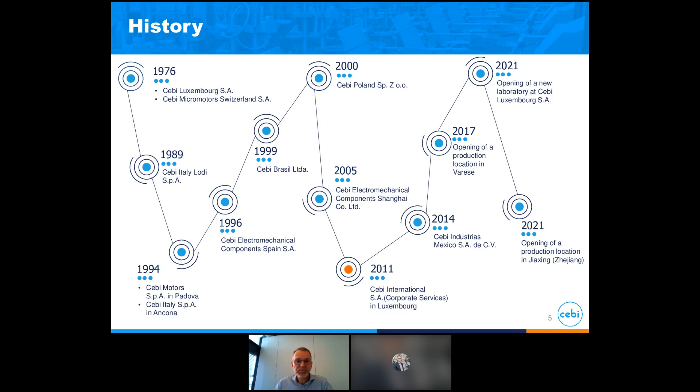From a map footprint perspective, we are heavily centralized in Europe, in terms of our people but also our business. About 85% of our turnover is Europe. We do have a plant in Mexico, one in Brazil, and one in China. Mexico and China are growing very fast, which is obvious due to these large markets developing there, but they are still small compared to the rest of Europe. So we are basically a European company, but we can serve global customers very well.

Because we get a lot of requests from customers to express our commitment to being carbon neutral at a certain moment in time, we fill many forms. We do a lot of calculation down to the fuel consumed by the ship that ships our parts and so on. It's really a jungle in a way to figure out what to do to respond to this need, and we're also too small to push this down our own supply chain. So we're interested to understand where everyone is, and if somebody has a good idea on how to approach decarbonization, I would be interested in some feedback on that.

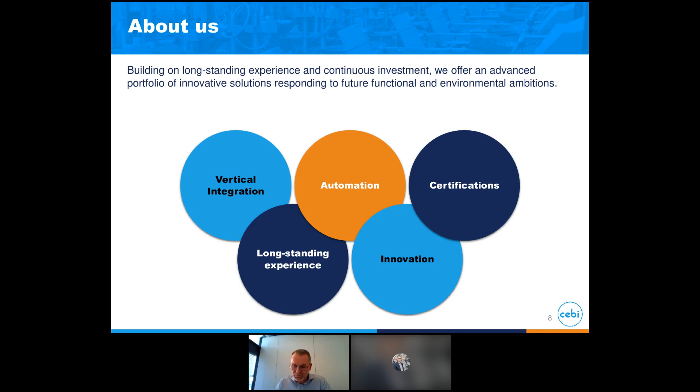Okay, then I want to dive a little more into the product, but not spend too much time. We divide our business into 4 different sectors. It's the automotive sector, it's the household or white goods sector. Then there is a small residential and industrial sector with mainly ventilation and air conditioning products. And then on the right side, the electric vehicle sector that is seen a little bit to the side for the specific components in power electronics. But as you can see on the bar chart or the pie chart on the top, most of it is automotive.

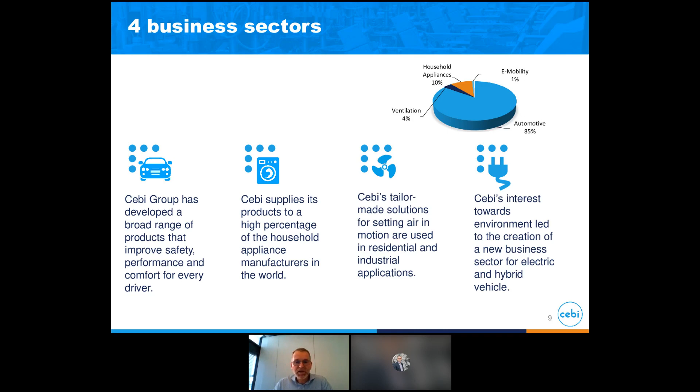We actually attempted to diversify, and that is maybe worth another discussion at the end. Especially during the crisis when no cars were sold back in 2020, we considered, okay, where can we sell our products outside of automotive? And we identified around 20 sectors where similar products are sold. But then we also found out, okay, it's a different world. In some cases the quality is way lower; in other cases it's way higher, like in aviation, for example. But also the way of doing business is different, the network is different, contracts are different, so you can't just diversify overnight, except if it's something coincidentally very close to something you do already. So we did not do that step in the end. We remain an automotive company with a 15% non-automotive share, but I'm interested to hear if somebody else has made a step like this and what their experience is.

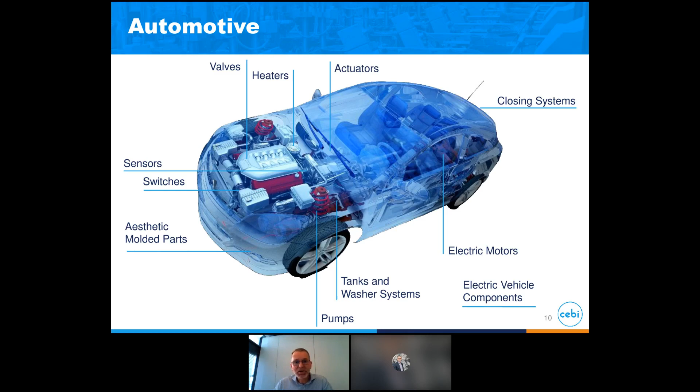So now the automotive products, you see it's a little bit all around the car: sensors, switches, plastic containers, plastic parts, interior and exterior, electric motors, closing systems, actuators, heaters. There are a few pages here that show the products in a little more detail.

Like I mentioned, the smallest temperature sensor is way below €1. The largest product we sell is maybe in the range of €30, with an integrated washer system, multiple pumps, pipes and nozzles and so on. So it's in that range where we navigate. I repeat myself, but I insist here that, for example, in case of a washer reservoir like this, we buy the raw plastic, we buy the sheet metal, and we do everything in-house. So the value chain is all under one roof, and we control the entire flow of material from the raw material to the final product, which is one of our secrets, if you will.

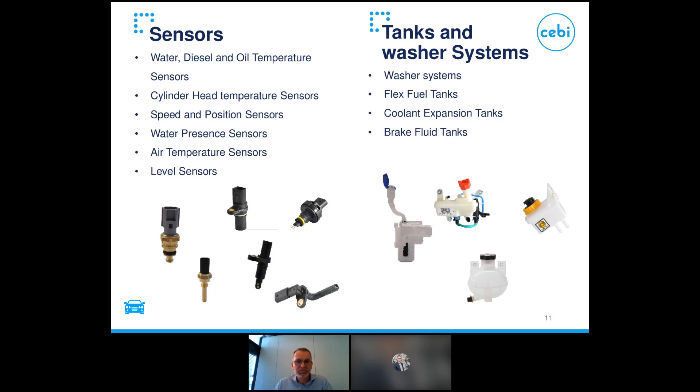Further products, some switches around the engine. These are oil pressure switches. Mentioned already the water pumps.

These are washer pumps for the windscreen washing, but now you also have these pumps that are turning the cooling liquid around in electric cars. Of course, you don't have a mechanical pump anymore, so they need to be electrical pumps. And by the way, there is more than one because you have more than one circuit. So this is a new product coming up that is already sold at millions and going up very steeply. Good opportunity for us. Likewise for some valves, pressure control valves, flow valves, check valves, and so on.

Then there is some heaters, less used in electric cars, except for maybe passenger compartment heaters, but these were more engine-related fuel heaters or anti-ice devices, and this is a business that is going down and then replaced by some other products.

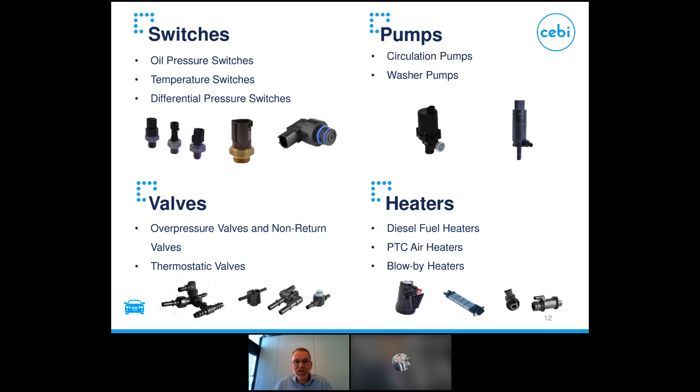Further down, actuators, so everything that moves a flap in the air conditioning system or that moves your headlamps up and down as a function of the vehicle load, those kind of actuators we're very strong at.

And then we're also showing some electric vehicle components. Just a little anecdote, we were actually one of the first companies making electric cars about 15 years ago. This was a Renault Twingo converted to electric. About 1,000 cars were built and sold in the southern Switzerland area. And then we stopped again because all of this was based on a sodium battery technology that didn't make it against the lithium polymer batteries.

So that battery technology was sold, and with that, basically the electric car production was stopped. But there's some product left, like the electronic DC-DC or AC-DC converters, actually a traction motor and so on. But we don't have the battery anymore, and then all these technologies are, I would say, obsolete right now because it's evolving so fast. So this is more of a historic product for us, ironically, in the current times. And we do not have intentions to re-enter the electric powertrain market again, because there are so many players already, and it's too big an investment for us to try and get back in there. So we remain on the level of the individual component or the small systems.

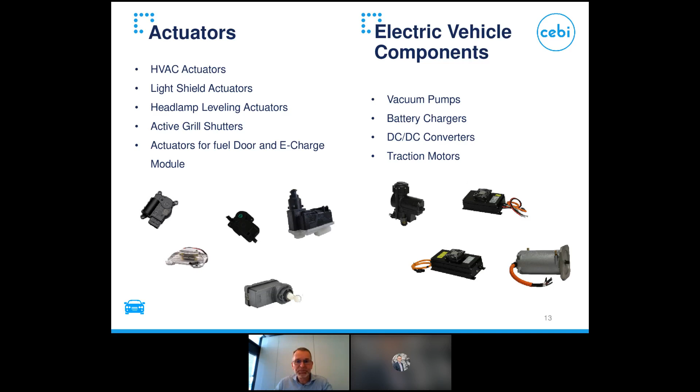More products, small electric motors, about 25 million per year for window lifters, seat motion, and also automatic door openers for certain cars. Then you have latches, not for doors, but for hood or trunk. So the hood latch, of course, is a mechanical latch, and then the trunk latch is an electrical latch in most cases.

Now with electric cars, it's very interesting because the hood becomes the trunk in some cases. So you need to have an electric opening and closing system also for the hood with different safety requirements than for the trunk. So this is, for example, a new product driven by electromobility that has nothing to do with the electric drive, but that is still a new product because the electric car is constructed a little different than the current vehicles.

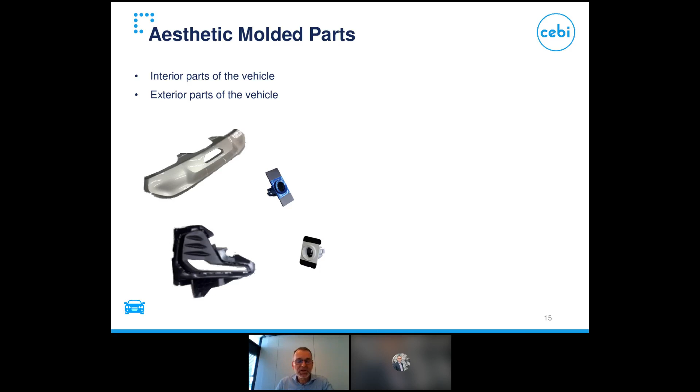And the new product that we introduced just 2 years ago is large plastic parts. You see a complete bumper here, and then you also have some exterior and also interior decorative parts. These are currently only made in Brazil, but it's an interesting business that we discovered because we do have very strong knowledge in injection molding, and so far we only used this injection molding to make our own parts until a customer told us, why don't you offer a bumper or an interior trim? And we found out that with the knowledge we have, it's something we can do. And since then, this has been a growing business for us.

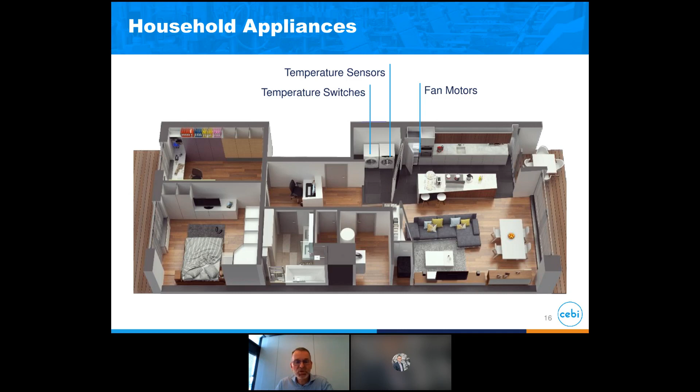Then I want to cover briefly also the other side of the business. So household: dishwashers, dryers, washing machines, suction hoods, fridges, and ovens.

If you look at your oven at home, you probably have this fan in the back, and it's likely that this is one of our motors. We supply all of the electrodomestic suppliers in the world, so we're really very present. It's not big business, but it's a stable business.

Then you have fridges with these little fans that move the air around the fridge, so you don't have any cold spots or warm spots in the fridge. You have the thermostat for the fridge, and then some small thermostatic or bimetallic switches.

This is the product that I said is the never-dying product, even though you would say that today you can easily measure a temperature and have an electronic control of a temperature and do a switch, but the mechanical bimetallic switch is unbeatable in terms of cost and reliability. So that all the dryers and all the devices, also like coffee machines, they still have a bimetallic switch inside, and most likely this was built in Steinsel here in Luxembourg.

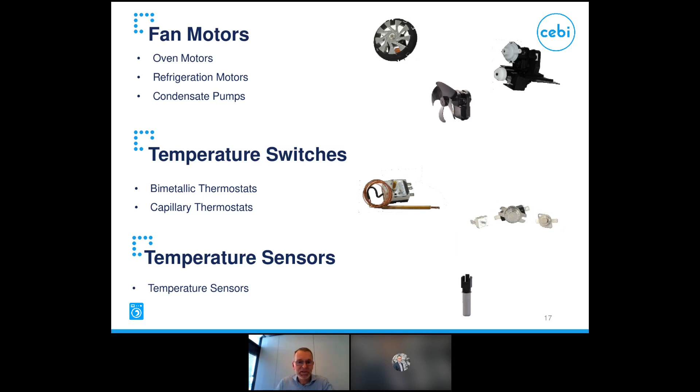Also, the plastic is made, the winding of the motor, the epoxy potting, the electronics is made in-house. The electronic circuit boards are produced in-house as well. So that is a real nice example of a product that goes from casting to high-tech electronics all under the same roof, and actually physically under the same roof.

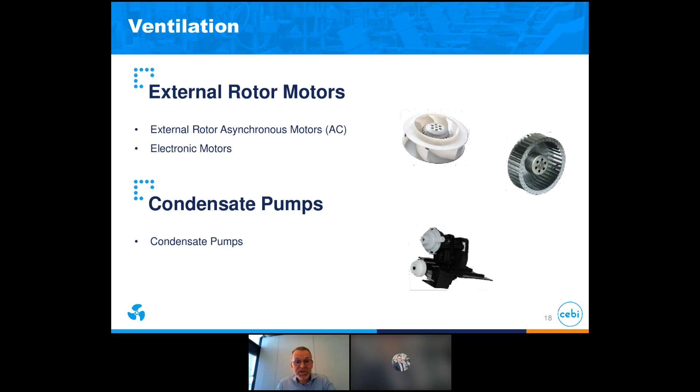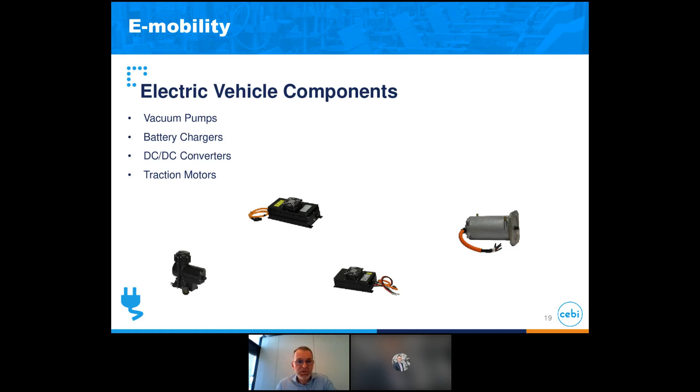I mentioned these products already, so no need to talk more about this. So that covers it for the products. In terms of technologies or know-how, I mentioned the manufacturing technologies, so metal stamping and cutting, deep drawing.

In some cases, we have very old machines that are automatically stamping and stamping the whole day with no maintenance, because they are old and robust machines. These are very small parts, like, for example, connector pins we do in-house. But if you look over time, you save a lot of money if you do this in-house, because buying these parts, especially in small quantities, could be quite expensive. So this is something we do ourselves.

Then I mentioned aluminum die casting, rotor winding, injection molding, electronics manufacturing. We have 4 electronic lines making circuit boards with a surface-mounted reflow process. And then the usual plastic assembly and bonding techniques like heat staking, ultrasonic, or also laser welding.

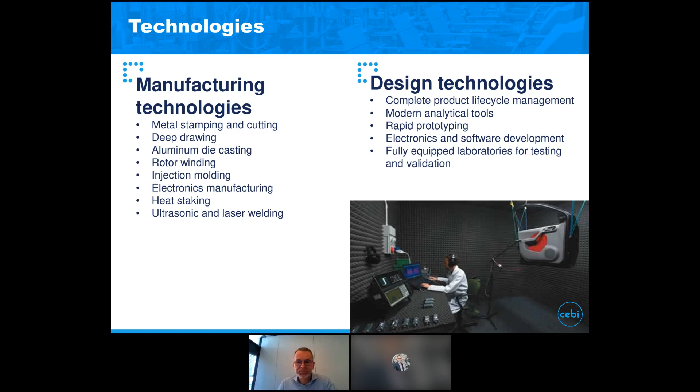In terms of innovation, I mentioned already, so we innovate on the process side, we innovate on the product side. I would say the major trend we see today is the smartness of the product. So when you have a temperature sensor or a heater, typically you have 2 pins, you connect them to 12 volts, and then they do something. In the future, you will have 3 pins, and the 3rd pin is a digital interface.

And so inside your part, now you have electronics that controls the part, that does self-diagnostics, that maybe has some intelligence to figure out what the signal actually means, and then talks to the central controller. So we see an increase in content of our parts in terms of electronics and intelligence.

And the other trend we see also is that customers like to go to systems or module suppliers. So instead of buying 5,000 components making up the car, they want to buy 50 modules and systems and not worry so much anymore about what is inside the module or the system.

So we are also obliged to move to system integration, or to partner up with a system integrator that we supply with components, and then the system integrator takes care of making the components work together and sell them as a module or as a system. That trend is not new, but with the electric cars, it becomes more pronounced.

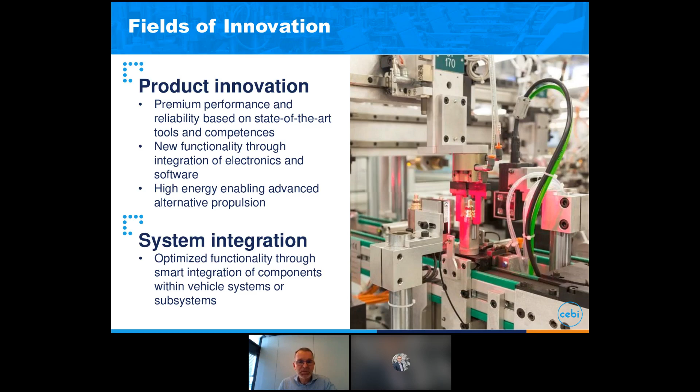Then in terms of industrialization, and we will talk about Industry 4.0 as well in a separate agenda item. The company that makes our lines is called Bimatic in Italy. It serves only ourselves, so we do not sell equipment to the outside. At some point we were thinking about that, but you have to organize yourself quite differently if you want to serve external customers. So this remains a purely in-house operation, but about 60-70% of our lines are actually built in-house.

Last but not least, open innovation is getting more and more critical. I will come to that also in the Industry 4.0 section, but we see more and more the benefit of working with public and private partners, also smaller startups that have specific knowledge in a very specific area. I could mention laser welding, for example, where we had a certain need, and we worked with a PhD student on that and really developed a completely new process within a good short time, simply by partnering up with the university and having a student working here. So it doesn't have to be difficult and expensive, we have very good experience with this.

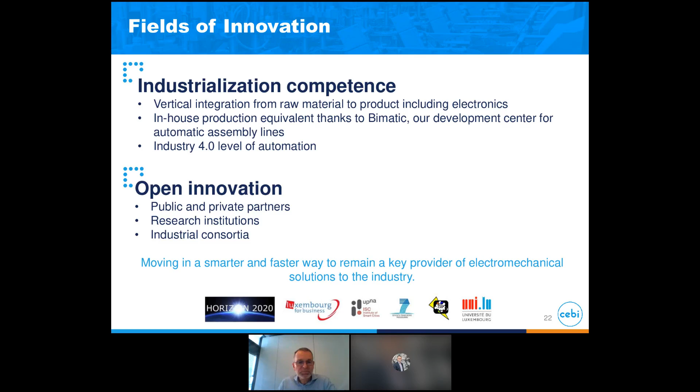So in terms of size, you have some numbers here. The picture here shows the new building, and I will come to that. We did a new construction just two years ago. Actually, we moved in last year. This is an R&D building and an administrative office, but unfortunately what's not seen on this picture is a relatively large new testing lab that is also open for services to the outside. I'll come to that in a moment.

On the right here, you see our mix of customers, or rather the companies that we ship to. So we actually do ship, of course, to France and Germany, but also outside of Europe from here. Actually 15% to non-Europe and another 10% to China from Luxembourg. It sounds a little bit like an inverted world, because normally, especially for the type of products we make, you would rather say you make them in China and then you bring them to Europe. While in our case, it's the opposite, sometimes driven by customers, you know them, VW, for example, that you supply a vehicle in Europe, and then that vehicle is also produced in China. So you just ship the component to China rather than building a new manufacturing line for perhaps a relatively small volume. That is really the effect leading to the fact that we are exporting to China.

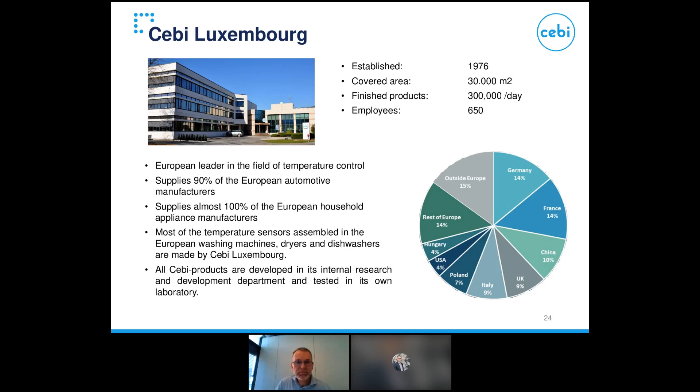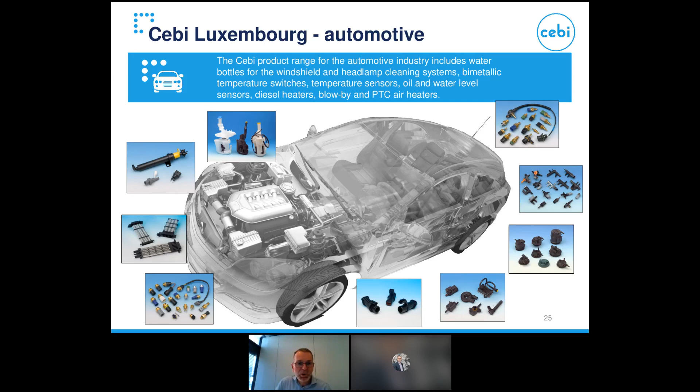So this is Luxembourg. Now you see the same products, but Luxembourg focuses on the washer tanks. So you see these reservoirs with the washer pumps and the pipes. Also telescopes for headlamps, then the heaters for passenger compartments, small switches and sensors, mainly the temperature sensor. We are one of the European leaders of temperature sensors, so it's very likely that your car actually has one that was built in Luxembourg. We're making over 20 million per year. Then smaller components, for example, here the diesel heater, some that is integrated with the filter, and also heaters for the de-icing of the blow-by duct in the combustion engine.

Okay, this concludes the presentation of the Cebi Group.

I see some question here. What is the gross margin of the group, please?

I can tell you the turnover. It's about 450 million turnover, not margin. We never reached the 500 million goal. It was supposed to be reached in 2020, but then COVID hit and automotive sales went down. So we've been stagnating a little over the last 2 years, and this year will not be better in terms of revenue. I can't give you information about the margin, unfortunately.

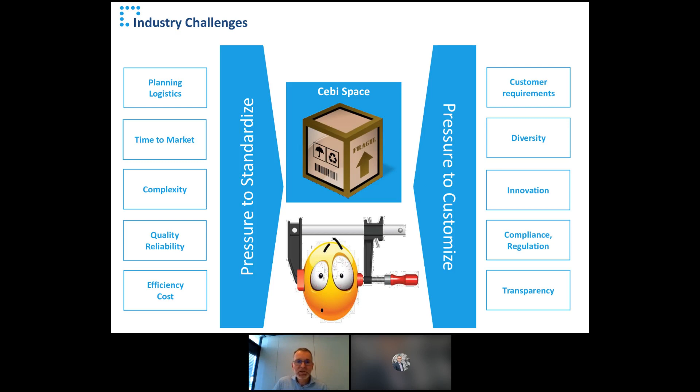So the space in which we move is becoming more and more constrained, and the only way out of that is really to digitalize. So you have to replace hardware with software, to replace physical installations with logic that can easily adapt. I'm thinking about, for example, a press versus a robot. To change a press, you have to buy a new one, but to reprogram a robot, this can be done in a day. So that is one way to give you more flexibility in certain operations.

So the Industry 4.0 is no different. It's a digital innovation program, even though it does have hardware related to it, but it's part of a larger initiative that has a very high content of, let's say, digital intelligence.

Why do you digitalize? These are some of the benefits that we see being a production company. You get real-time data. The data is visible, which is sometimes the challenge in itself. It's traceable. You keep all the history. You need it for compliance, especially when it's a critical characteristic of a product that you want to know how it evolves over time and whether it is within spec. Now you can track it, correct it, adjust it, and prove it. So compliance is a big element here. Efficiency, of course, you want to have your machines running. And as I mentioned before, the diversity, so that you can adjust very quickly to new designs or other conditions that change without having to go in there and unscrew any machines.

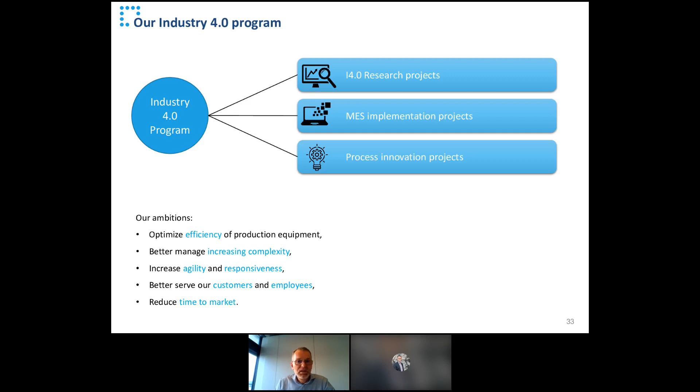So I promised to talk about one research project. In this case, it's simply to connect the machines. So of course, the first step is: does my machine have a plug where I can extract some data, and what is that data? Is it just counting the parts? Is it collecting forces and temperatures and pressures and motions? Does it recognize each part? Does it serialize the part? Does it keep traceability information? So what data can you collect of each machine?

And then, of course, the first parameter that you try to calculate real time is the OEE. Now, there are different definitions of what OEE means, but I think it's operational equipment effectiveness. So it means that if your equipment is theoretically available 100%, that 100% is reduced by its availability, its performance, and the quality it produces. And that gets you a number of, let's say, 80%. And now you have to figure out where the remaining 20% comes from, and what is the root cause.

In the past, we had these numbers already on a piece of paper that was posted next to the machine. Typically, those were numbers from the week before or something, and you could by no means understand what was actually causing the number to go up and down.

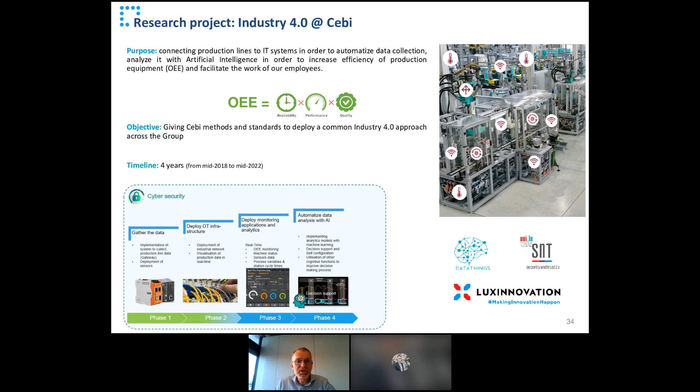I also mentioned the manufacturing execution system that is much more down to earth. So it's basically a platform that allows you to manage the data related to production planning, the work order management, traceability information, so part by part data that you just have to track and store in case of issues with your customer, maintenance operation, reporting.

And also connections with the PLM and the QMS. I mentioned before that our systems are not talking to each other yet, but as the data comes in more and more in a standardized and consolidated form, it becomes obvious that you can connect these systems and now have a common source, a single source for everything, and be able to see everything on one system without having to switch platforms, for example.

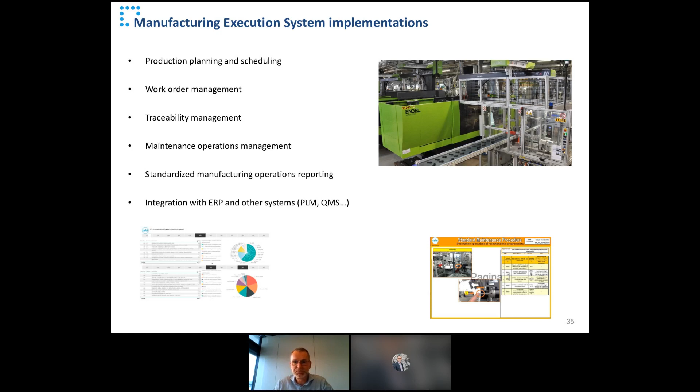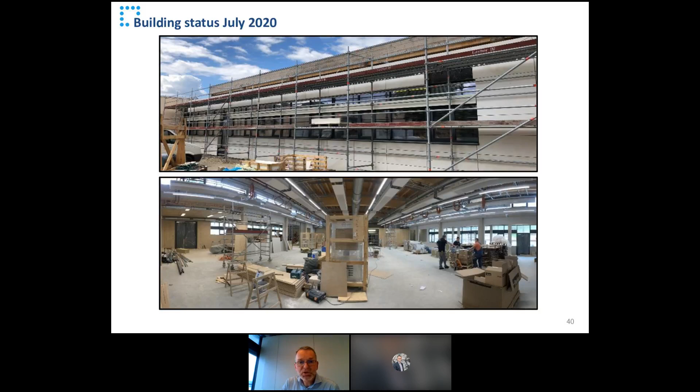So we signed that agreement. We built the lab, we put the investment, and I can go through it in a minute. This is just a picture of the construction so you know what's there.

The largest number of pieces of equipment are thermal and climatic testing chambers. The largest one is about 1 cubic meter, just to give you an idea of the size. You put your components in there and cycle the temperature - the extremes I can mention are -70 to +300, though not every machine can do that range, just to give you an idea. Then humidity from maybe 20% up to close to 100%, to meet the most common automotive standards for thermomechanical endurance.

Then you also have thermal shock testing. It's pretty much the same, except within the chamber you have 2 zones, in one case 3 zones. On top typically a hot zone, say 180 degrees, and on the bottom a cold zone, say -40. You switch - your components are in a basket - from hot to cold and back, to simulate, for example, driving through a water trough, affecting your components through thermal shock. This is very common validation equipment, but we multiplied it because it takes a long time, in some cases 1,500 or 2,000 hours, so you can't run in sequence. You really need to duplicate equipment to handle all the projects we do.

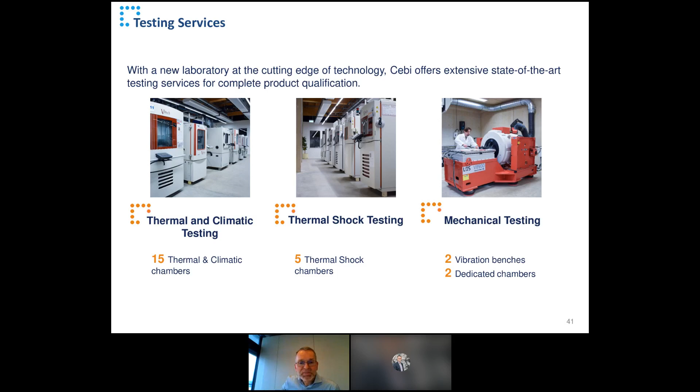We did invest in an EMC chamber, electromagnetic compatibility testing. The size of the chamber is big enough for automotive components and also industrial or domestic equipment components, with frequency range currently up to 6 gigahertz, both for emissions and immunity. This piece of equipment was added late to the project, but with electromobility and the new 5G and various other reasons, it became more and more obvious that we need this facility to validate against electromagnetic requirements that are becoming more and more stringent very fast.

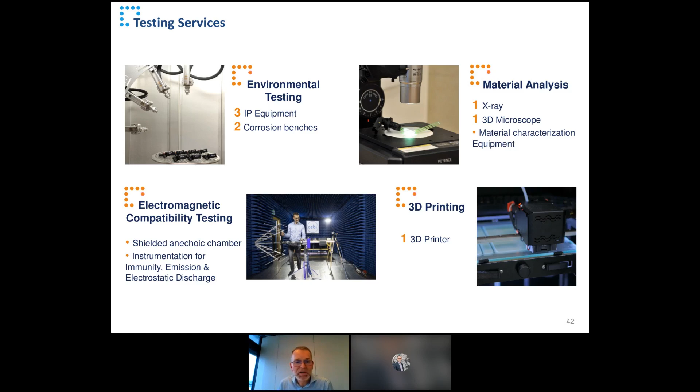And we also have a 3D printer to make our prototypes. So this should give you a flavor for what's here. Of course, anybody is welcome to visit this lab whenever you're available or coming by in Luxembourg. We're pleased to show it to you.

Of course, the intent is to see if you're interested in using the lab. I'm sharing the website here so you can actually see and download brochures about the testing in a little more detail than what I just showed. Send us an email and say, look, I'm looking for a test for this kind of component. Is this something you can do? Can I get a quote? And then we will respond to you within a very short time.

Maybe one last comment. By the convention I mentioned before, we are obliged to sell at market rate. That's obviously driven by non-competition rules. So for us, it's not possible to either try to make a lot of money out of this, nor to make a favor to someone and say, look, come to me and I'll give you some tests for free. That doesn't work. We are really audited and bound to proven market pricing. That makes it easier in a certain way because there's no long discussions about the cost.

And the other thing is that, of course, in terms of capacity, we have to see what's available. We have to reach a certain amount of capacity we share externally. We have not reached that yet. So at this time, we're actually looking for additional customers willing to do some testing in our facilities here.